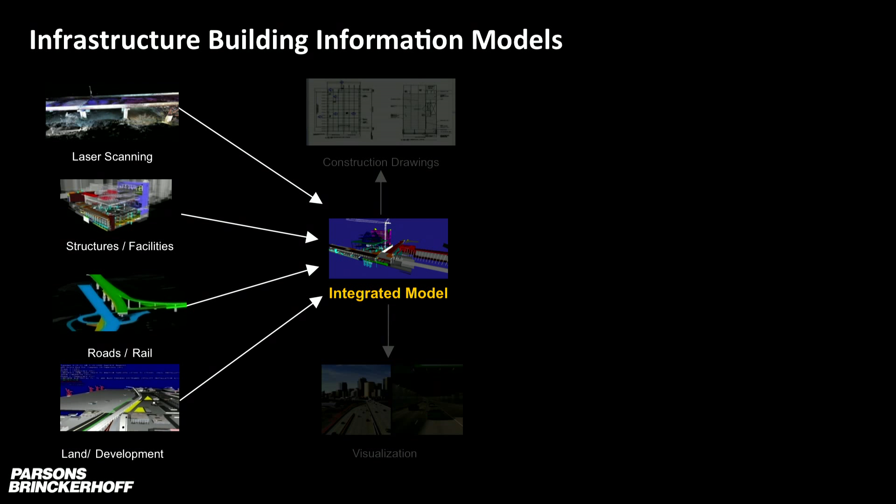And what that allows you to do is combine several 3D models together. You laser scan existing conditions, you build your structures and facilities models, roads, rail, and land development. And then what you do next is integrate your model into one data set. Now you're going to ask, why do I need to do that? Because what this integrated model allows you to do is generate construction drawings, use it for visualization, public outreach, and

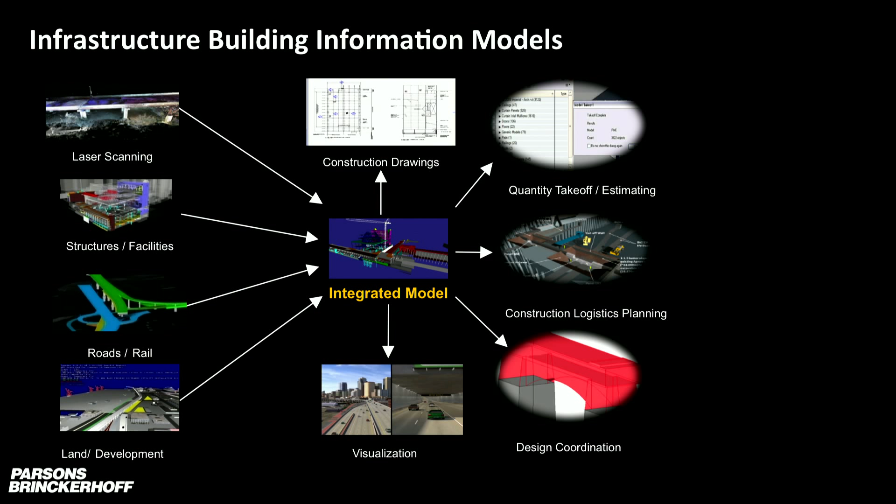communications, stakeholder management. And then more importantly, you'll be able to take quantity takeoff, do construction logistics planning, validate your design before building it, and then you can add cost attributes, do constructability reviews, and we're seeing a lot of clients asking for those BIM models or 3D models so they can use them for operation and maintenance.

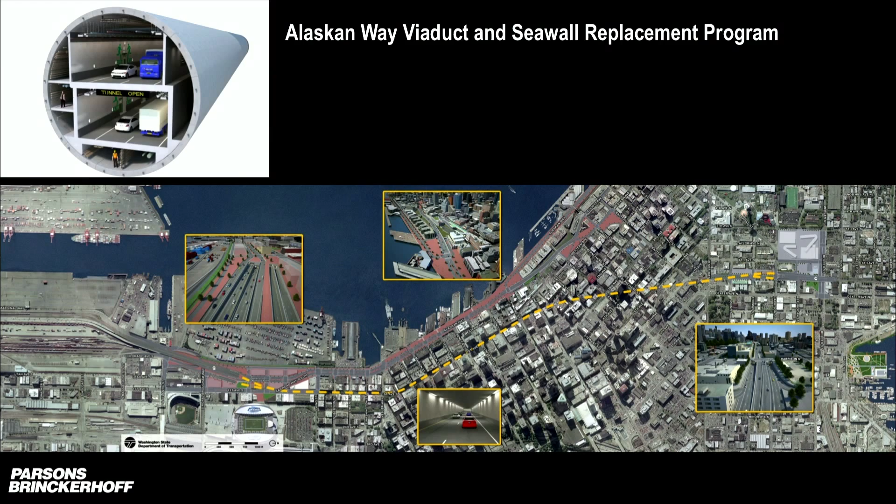Now, I'd like to talk about an example. I worked on the Alaskan Way Viaduct and seawall replacement project for 8 years. The existing viaduct was damaged after the 2001 Nisqually earthquake, and WSDOT embarked on a process to redesign the project. So from 2002 till 2006, they looked at how the project might be redesigned, and at the time, we started working on the job as a GEC, General Engineering Consultant, but our group was building a 3D model basically to show what the design looked like.

You've seen a lot of these simulations. This is my project, that's how it's going to look. But because we used a 3D based approach rather than an illustration, the model that we have started evolving. And by 2006, when those two options were voted down, WSDOT went back and looked at more than 90 different options to redesign the waterfront. It was a challenge. How do you display these options? And then it was all narrowed down to 8 different options.

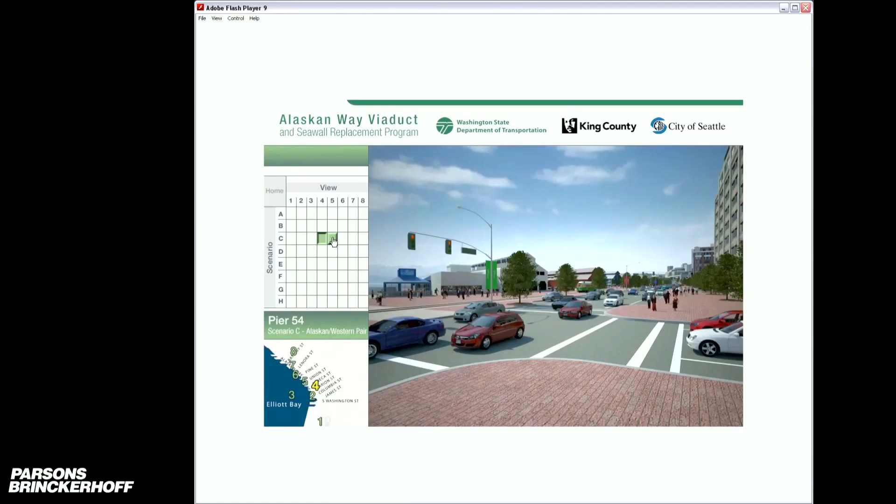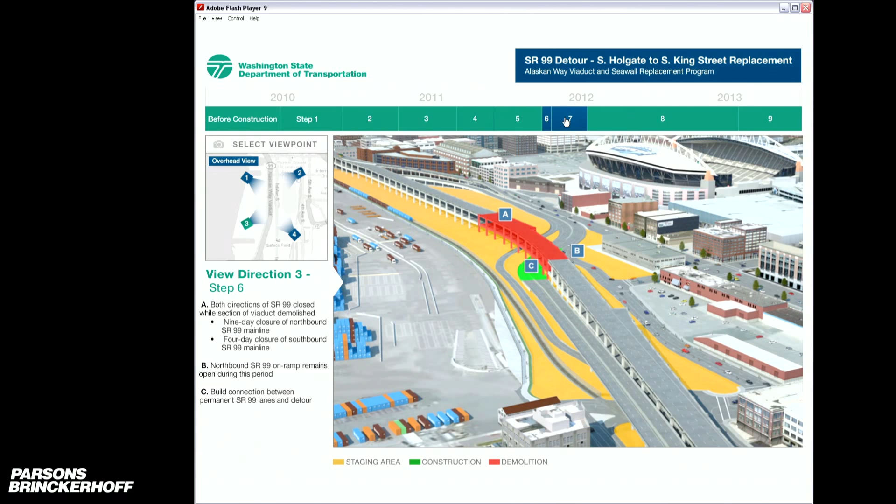So we leveraged the model that we have into those simulations and put them in an app that you can look at 8 different options and then compare between one option and the other. This was used for public outreach. It was used for the stakeholders to help them make a better decision. Another application of the same tool was looking at the South End detour. So with a quick slicing of the model, you can generate construction phasing and then package it, put it in an app that's accessible by anyone.

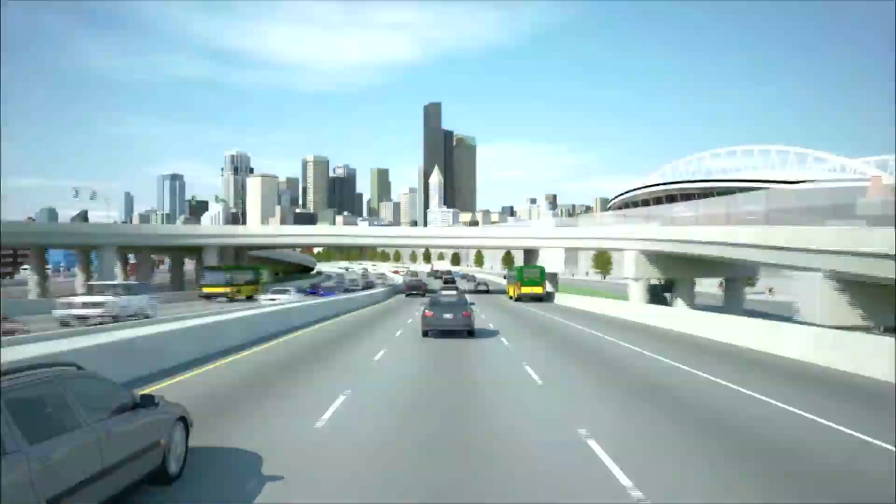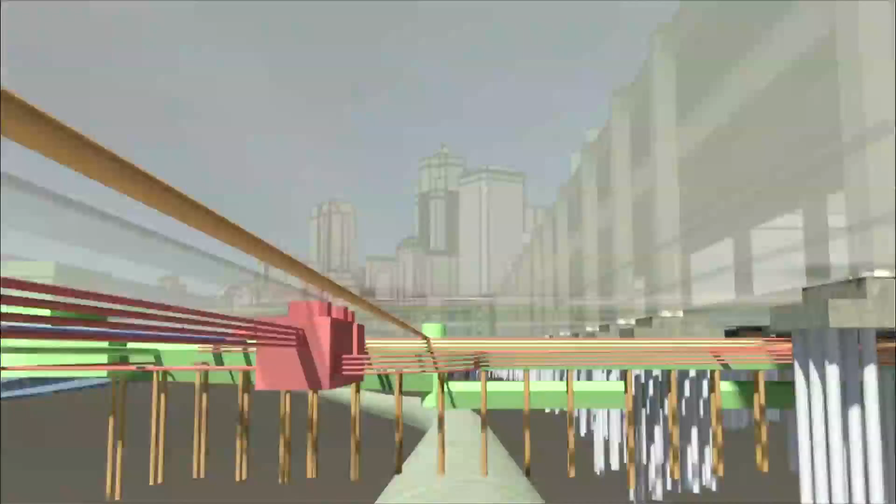Now, by 2009, when the decision was made to build a deep bore tunnel, we had developed the entire city in 3D. So right now, we have the whole Puget Sound area built in 3D. And this is an example of how this model was used on the project to show what the new design is going to look like. The model was built from accurate GIS data. It leveraged the exact same footprints, but more importantly, we were able to map all the underground utilities and place different alternatives under the city and help the designers and the project team pick the best option for the job.

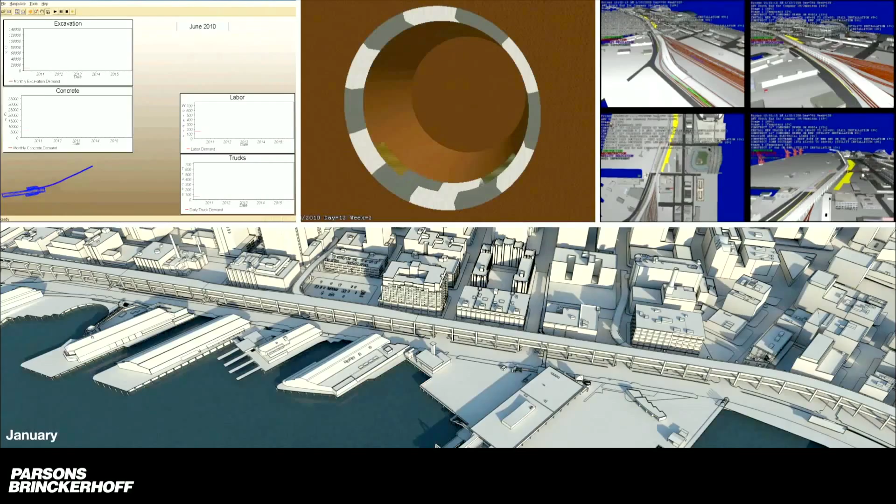So again, having a tool like this enabled us to answer any question that they have. They wanted to know the depth of the crown. They wanted to look at constructability. This is an example of a dashboard that we put together that shows light and shadow studies, which is really important for the environmental process. When you look at 8 different options, these things come into play.

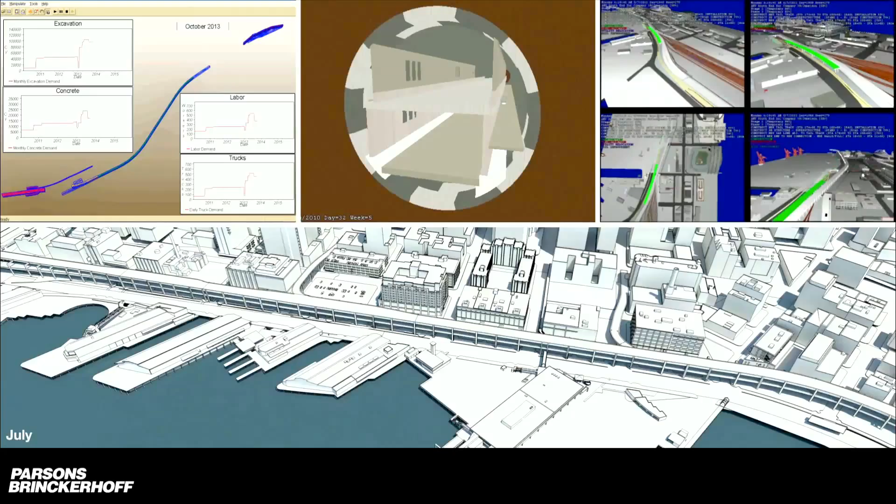You're looking also at demand for excavation, concrete, labor. You're looking at the constructability review of the deep bore tunnel and then the South End construction sequence. So again, this database that started with a simple simulation started growing into more of an information data set where you can access any piece of information that you want.

Now, another interesting application of the, sorry, I apologize. Let me see. This video is not running.

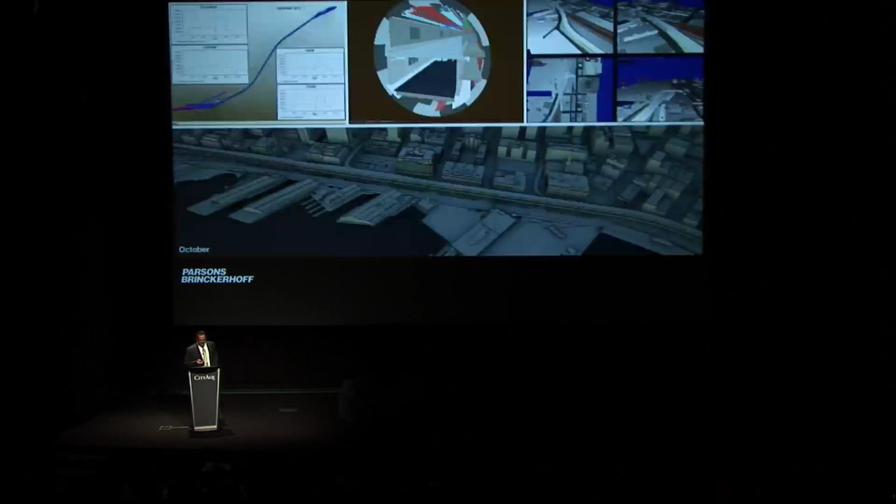There. So here's another interesting application of the data set that we have. In 2008, we were asked to simulate the collapse of the existing viaduct. So it's basically the same earthquake as in Nisqually, except it would have lasted 20 seconds more. We based the simulation on the Corps of Engineers seismic report, and we worked with the engineers to figure out exactly how this viaduct would collapse.

What you're seeing right now is, again, the same data set, the same 3D digital model of the city, except we overlaid the lights because we wanted to highlight that they would lose power in the event of an earthquake. And so that's the Alaskan Way Viaduct. That's the existing structure, initial shock wave.

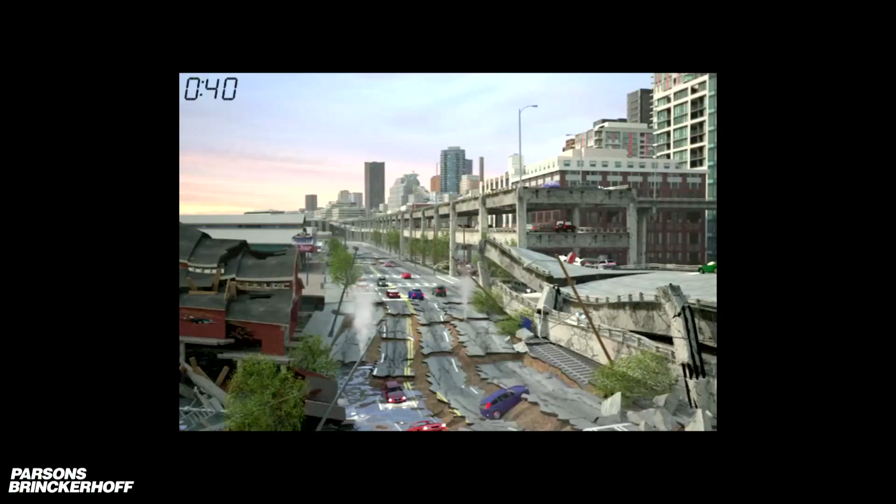So soil liquefaction starts, and then it compromises the seawall. So once the seawall fails, then it compromises the foundations of the viaduct. Power goes off. And one thing to note is that this is accurate. This is data driven, and it's feeding from the engineering data.

All the cars, all the other data sets and props are linked to it. So when it falls, it's physically accurate how everything else collapses. When we zoom out, we're looking at different failing mechanisms. This was something that was coordinated with bridge engineers and seismic experts from the University of Washington. So there's pancaking, plunging, and other failing mechanisms.

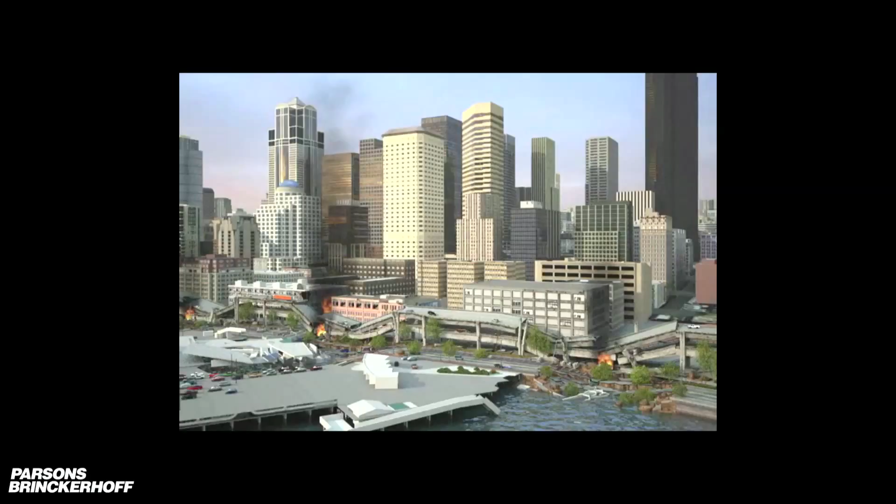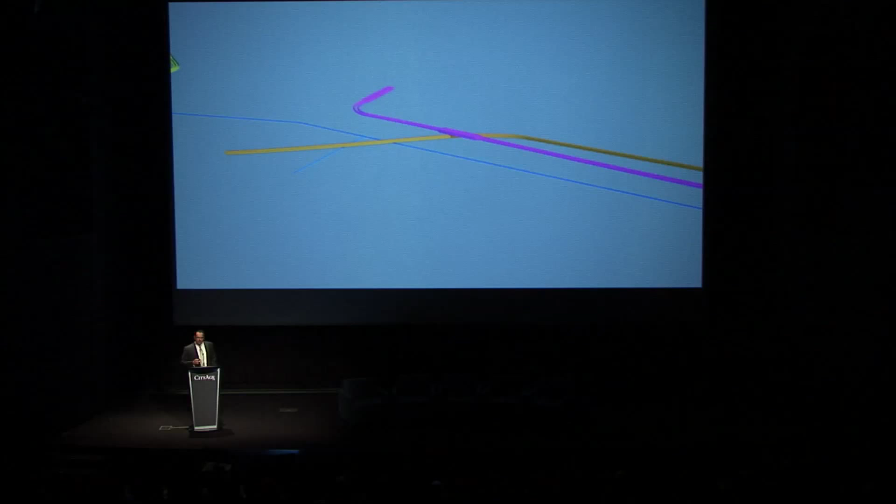So we looked at the factors that shape urban growth from a transportation standpoint. There are other things that affect urban growth: land use, zoning, sustainability, infrastructure, energy, resiliency. Once we had this model built, we started realizing that we have so much information in it. It's a living document. Every time we have a new job, we input more into it.

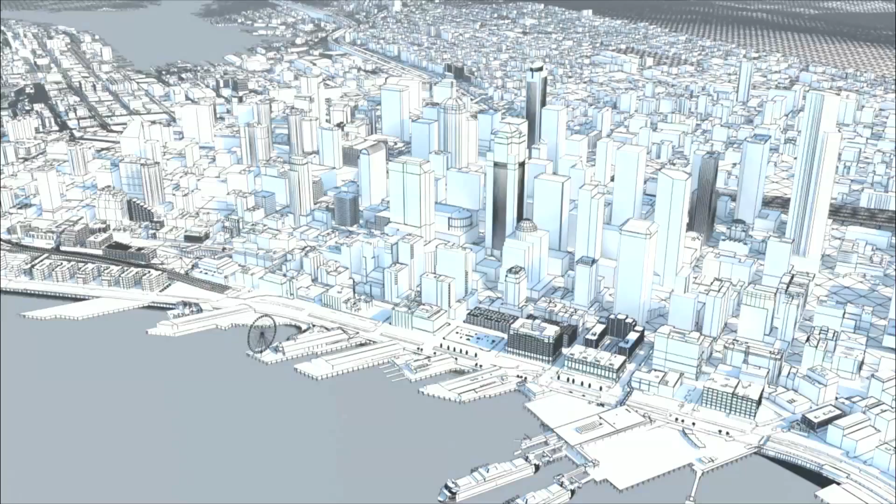So now we have existing tunnels that are underground. We have the proposed tunnel. We have the utilities, the seawall. We have all the terrain. We have all the buildings. And then we're adding energy metrics to it. We're adding land use. We're adding all those attributes.

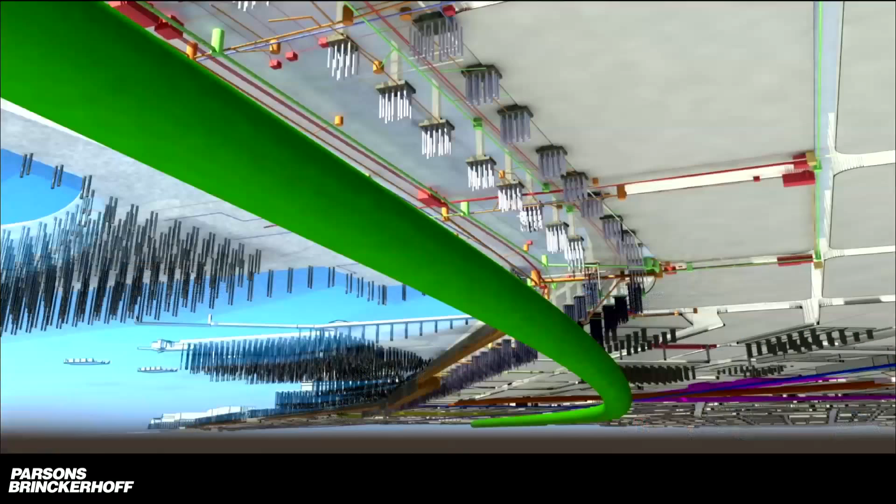So you end up with basically a virtual city that you could use for visualization. You could use it to communicate design concepts. You can pick any view, above ground, underground. And then you can also overlay traffic simulations on it. A very important issue in any city.

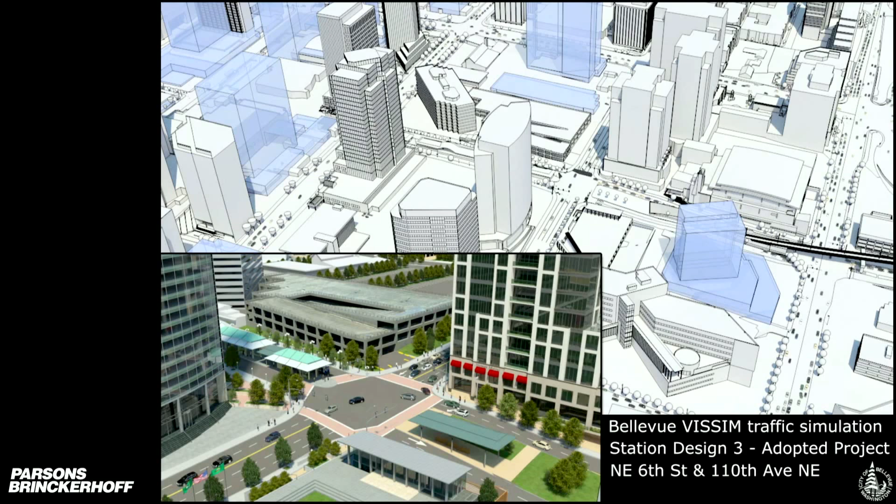VISSIM, traffic simulation software, can simulate now any option. They can look at different alternatives. They can validate what the new intersection is going to look like, how a new development is going to impact a certain road or highway. But now you can overlay all this information into the same data set that you have.

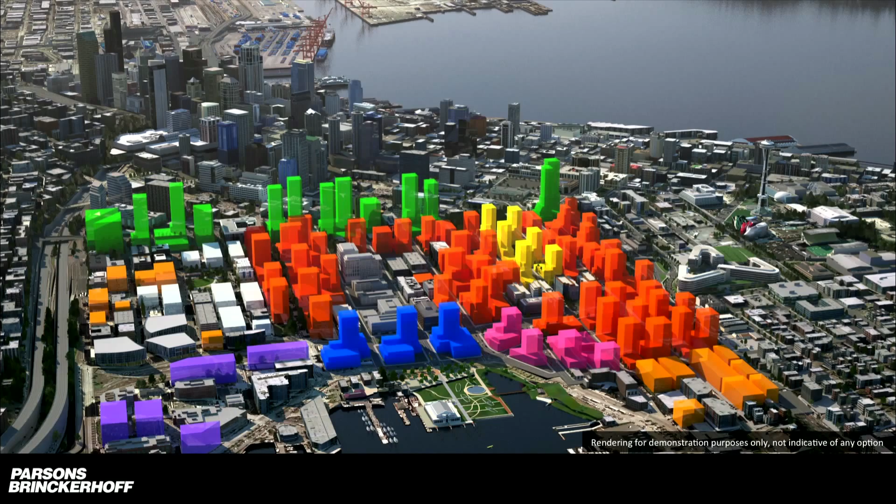Again, another use of the model was looking at land use. This is not a photo, it's a rendering. And then we're looking at existing zoning, looking at a possible suggested zoning. Hundreds of design ideas come up, and you could quickly look at how it's gonna be in the city. View corridor studies. Pick any view in the city, and simulate what a development's going to look like, what another proposed development's going to look like.

Because it's georeferenced and because it's accurate, you can simulate lighting conditions. Light shadow analysis is really important for the environmental process. You can look at any structure in the city, any area, and then simulate lighting at any time of day.

And it's all intelligent. It could calculate how much shadow there is, and then it could look for differences and compare scenarios. So that's the existing city. You can validate it with proposed developments, with other options, pretty much anything that you want. It's a virtual world.

Now, another interesting thing that we discovered along the way was if you tag attribute information to the model, you could run a quick simulation. So we went back to the city archives and online and found every single building, when it was built, and tagged this information. So now I can show you any given year, what the skyline looked like. So we started with 1960.

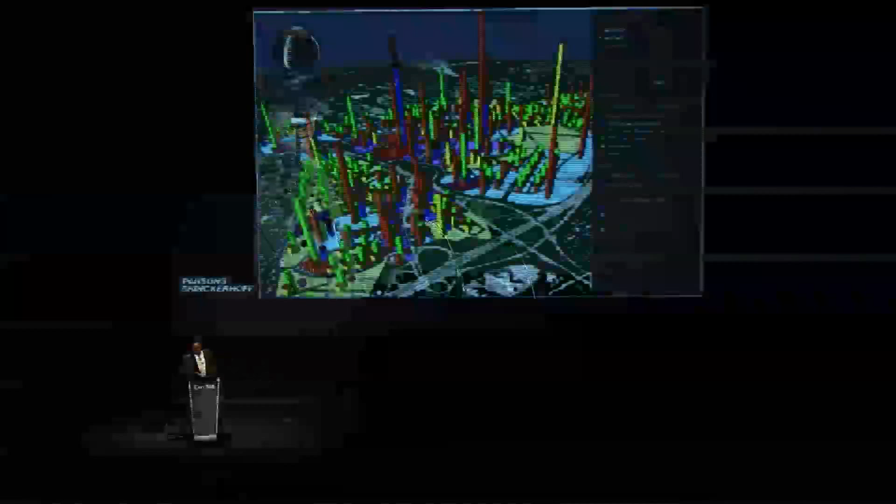This is another interesting application of the same data set. We're seeing a lot of interest right now in carbon emissions and greenhouse gas emissions. This is a Tysons Corner project. It's a transit-oriented development, and they looked at multiple scenarios, and we baselined the existing scenario, and then looked at in 5-year increments what is the carbon emission per capita, and also separated it. What is the carbon emission from auto trips, from building use, by residential,

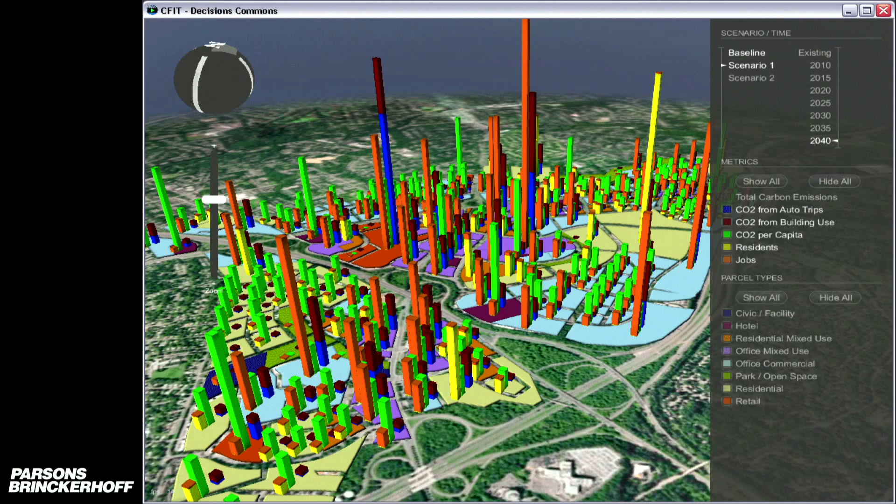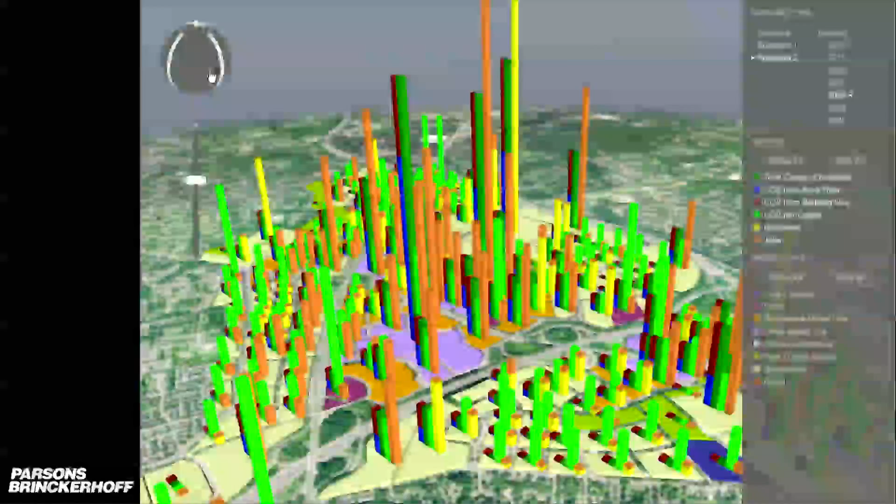office, etc. And what we did is we used gaming technology to link to the geospatial and design data sets and created this application where you can look at it in real time. Go to any time that you want, any year, look at different scenarios. Hovering over the bars would give you exactly what the numbers are. Again, it's a new way of sharing information and then helping everybody get on the same page before they make a decision.

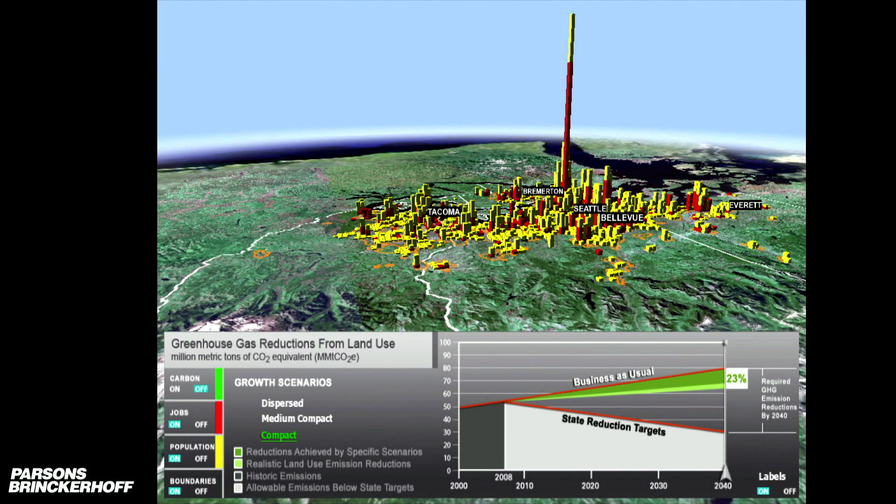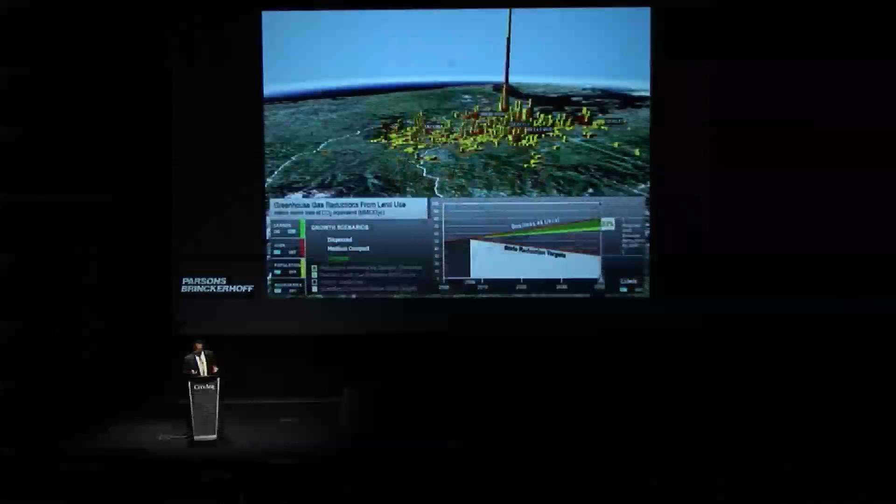Another example of carbon emission modeling is this tool that we developed for the Urban Land Institute. This was part of a reality check exercise that was done in Seattle with the major stakeholders in the Puget Sound region. So they gave everyone Legos and they said, we want you to think how this region might grow best. Is it dispersed, medium, compact? And those are the scenarios that came out of this exercise. We again leveraged the same framework of using this virtual modeling tool, and we looked at modeling those carbon emissions. We listed the business as usual reductions and then state reduction targets.

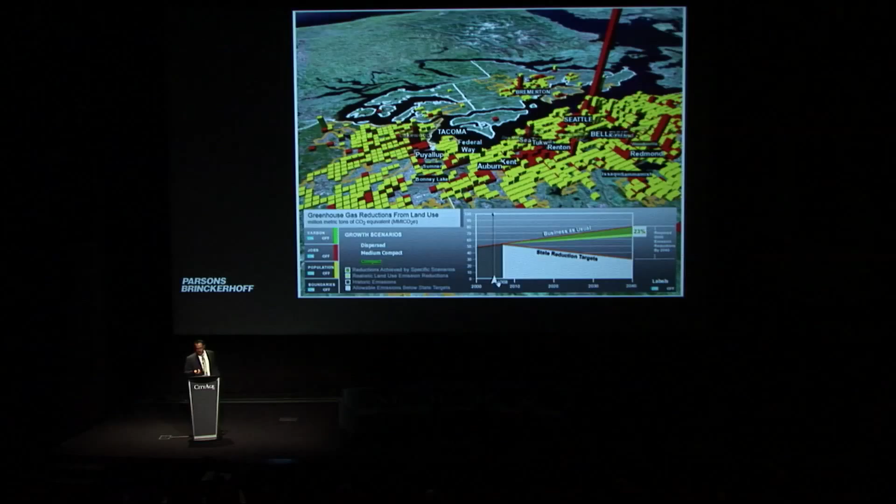So this is an executable file. You can take it on a thumb drive, put it online. But what you can do is you can navigate in real time and look at all these results. So rather than reading reports and taking the time to look at documents, this real-time application gives you all the information in one data set.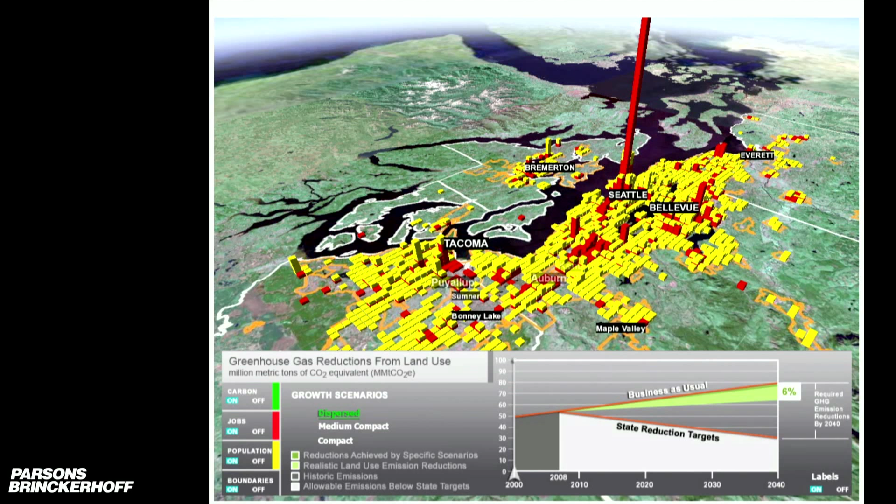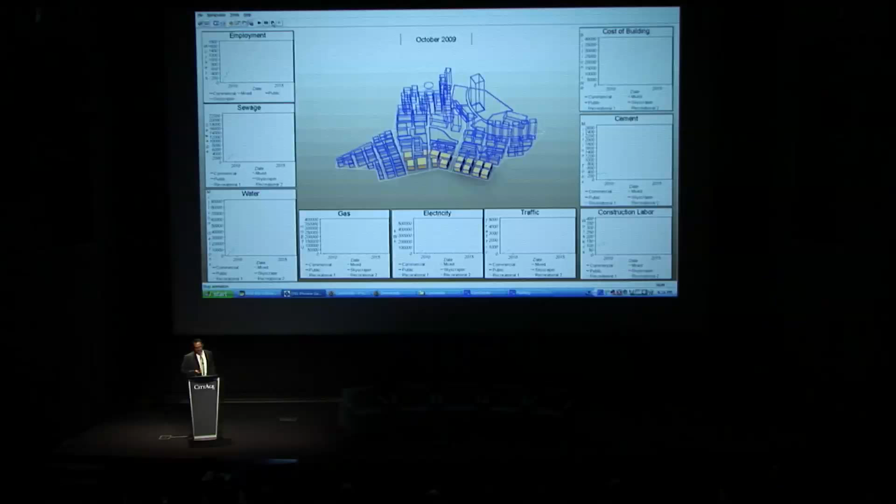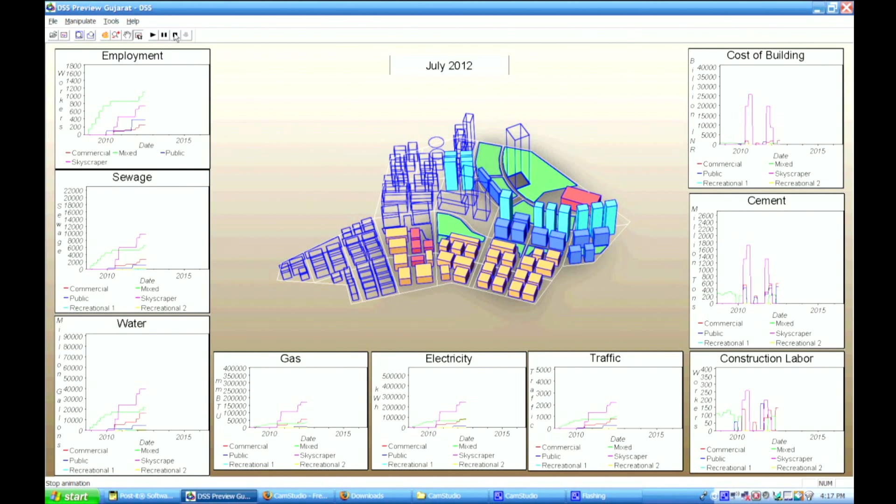And then this is where we see things are going. So this is a tool that not only shows 3D information with attribute data on buildings and design information, it also shows the time, which is the fourth dimension, but more importantly, all the attribute information that is in the model is displayed on this application. So at any given point in time, you can look at any metric that you want. In this case, it was employment, sewage, water, gas, electricity, traffic.

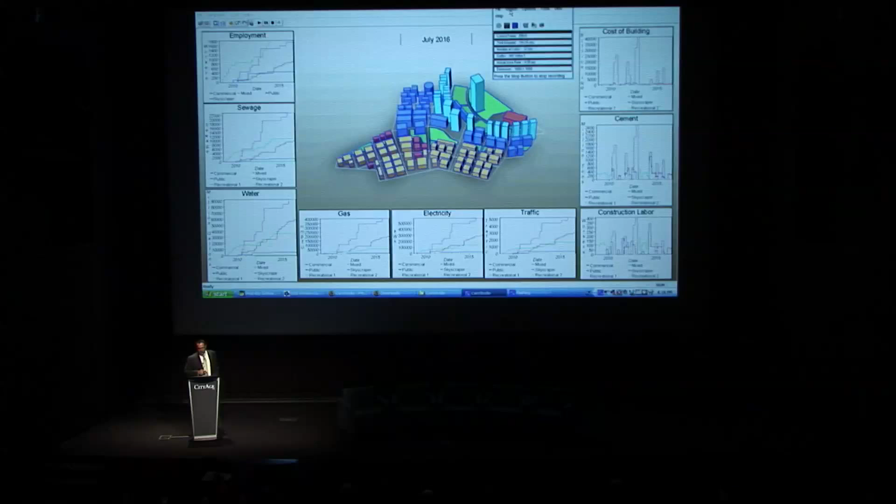So we think this is a great tool to help project design, and it's going to impact the way cities are going to be designed and the way they evolve. So the more information you put into these data sets, the more you can get out of it. It's a different mindset, it's a different framework, but once you start thinking what you can do with these models, the options are endless. And then I'd like to end it on this quote from Canadian futurist Marshall McLuhan: "We shape our tools and they in turn shape us."

We had no idea this was going to happen. In 2002, even before that, we started with simple simulations, 3D models to show what a project looked like. Now it's evolving into design validation, linking it to schedules to validate what the construction is going to be like, linking it to cost to find out what it is going to cost. And with new technologies, you'll be able to simulate hundreds of options rather than one option. It's certainly going to impact the way projects are designed and how cities evolve.